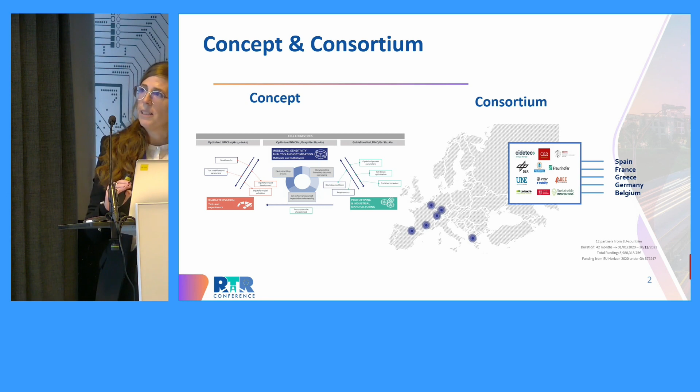So the main purpose was building the baseline on multiphysics modeling tools, very much dedicated to electrode fabrication, the electrolyte filling process, and then linking this to a specific process chain into the cell performance and cell aging.

So at the center, let me see if I'm able to, where is the, sorry, yeah.

So the main purpose, as I was saying, is building the multiphysics, multi-scale modeling on the electrode fabrication and electrolyte filling. And for that, we carry out a lot of activities in setting up the baseline, but we cannot forget that we are in a real area as well, and we need to have a lot of insights and a lot of information from the real cells, real materials, and real electrodes.

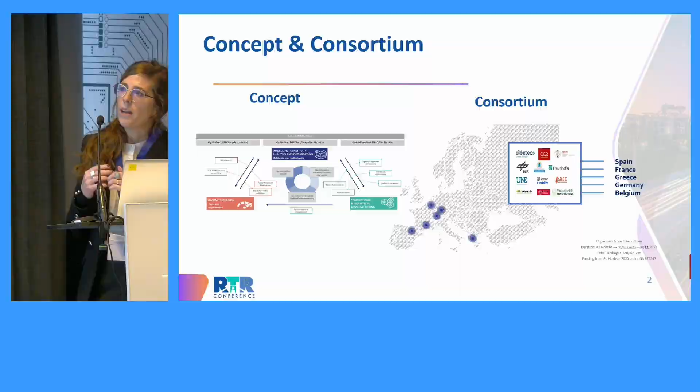So it was like a combined modeling effort. There were certain activities on the characterization, manufacturing, and without forgetting certain aspects on the standardization. So the picture was clear. We needed to build this baseline and to answer certain KPIs, and these KPIs were very much dedicated to increase the energy density, increase the cycle life, and obviously reduce the cost. And also certain activities on reducing the experimental workflow.

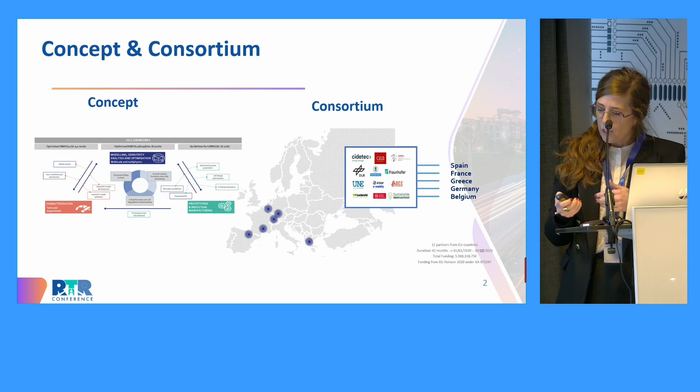So for that, obviously, CIDETEC is the coordinator of the project, but we are not alone in this. We've been working a lot with many partners in the consortium, and altogether we were 12 partners, so CEA, CERTH, DLR, UPM, Fraunhofer, UNE, IRITAR, ABE, Leclanché, TU Braunschweig, and Sustainable were building this huge consortium with this specific target of building these physics-based models, with this picture of having more insights on the electrode fabrication, electrolyte filling, and linking these two processes into the cell aging.

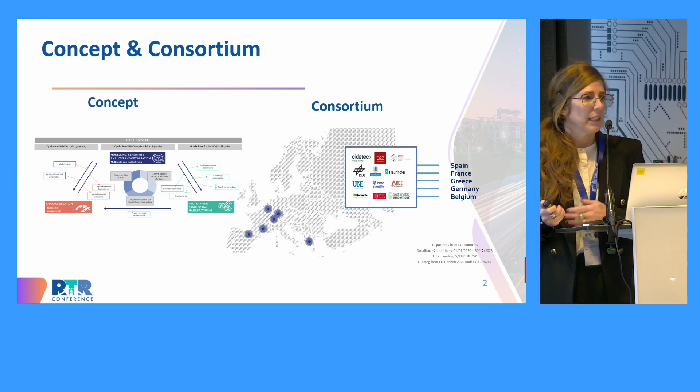So as I was saying, the project was started in January 2020 and was over last December. We had a total funding of 6 million euros, and it was answering the topic LCBAT 6. Yeah, so I like to include this slide, which somehow summarizes all the achievements. So let me start from the beginning, because I was saying that the main purpose obviously was to set up the baseline.

So we developed 12 modeling tools, very much dedicated to this specific electrode fabrication, electrolyte filling, and then addressing certain aspects of the aging. Then, obviously, the main purpose of having these tools was to give an answer to optimization, somehow reducing, as I was saying, the experimental workflow. So going straight to the point, identifying the main limitation on the cell level, or electrode fabrication or whatever. So having this information beforehand, then you can save a lot of time in the experimental workflow.

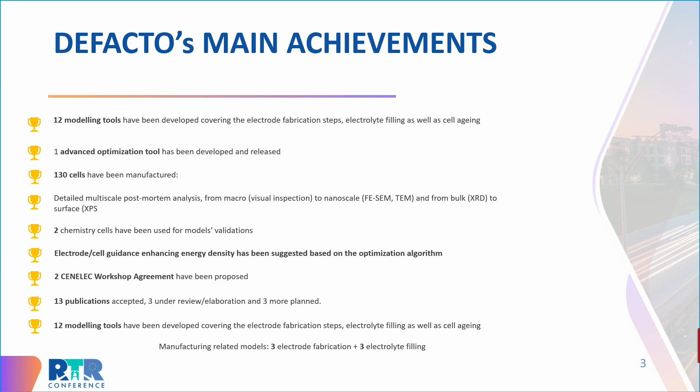And for that, we needed to carry out a lot of work on the experimental side as well as in the manufacturing. So we built around 130 cells, not only dedicated to one specific chemistry, because we navigated along the Gen 3A together with Gen 3B technologies, addressing the challenges for each particular chemistry. And then also, as we carried out aging on most of the cells, we needed to also understand a little bit the degradation mechanism. So we carried out post-mortem analysis, and then we linked it to certain electrochemical characterization dedicated to identifying the degradation modes. Then we were able to have information for model validation.

So in the end we carried out the activities on model calibration for 2 specific chemistries, and they were graphite NMC 622 and graphite silicon NMC 811, and we were taking this into consideration all along the way with the information from the optimization tool and from the post-mortem analysis. We were somehow able to guide this design space of the electrode fabrication and the cell configuration.

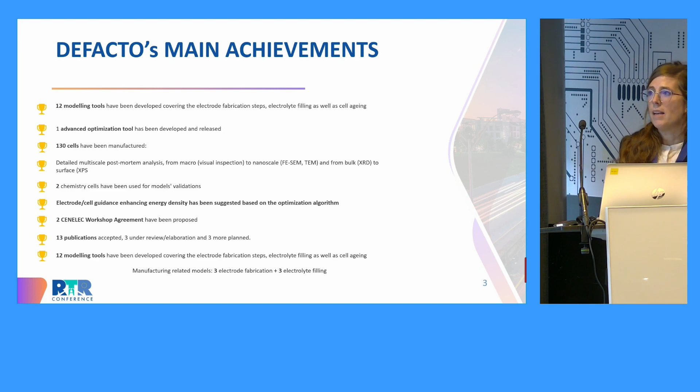So these are the main achievements of this specific project, but then we also carried out certain activities on the standardization, because when you are dealing with the modeling or even with the experimental side, you want to compare: my model is better than yours, or your experimental cell has a lot better performance than mine. We need to standardize the way we build this test, for instance, or the way we validate the models. And we had this idea of somehow contributing on this line as well. So we carried out certain activities there.

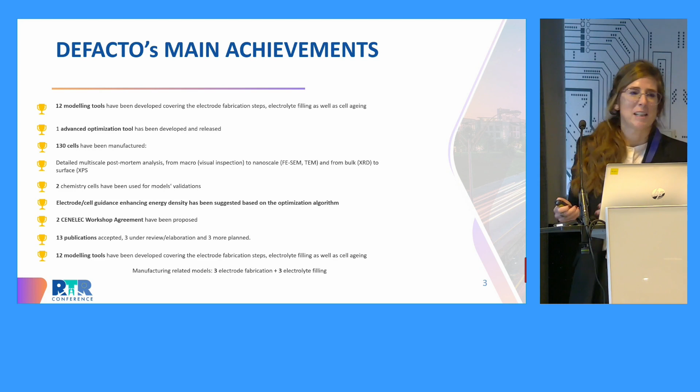And then we were able to do certain work for the academia, publishing results, but as well as open source, because we were able to release certain open source tools that are already available on the DEFACTO webpage, in which anyone can download, play with it, run simulations, and then give us feedback, because this is the purpose of having this open source available. So results, which is the most important thing today, I guess, sharing real results.

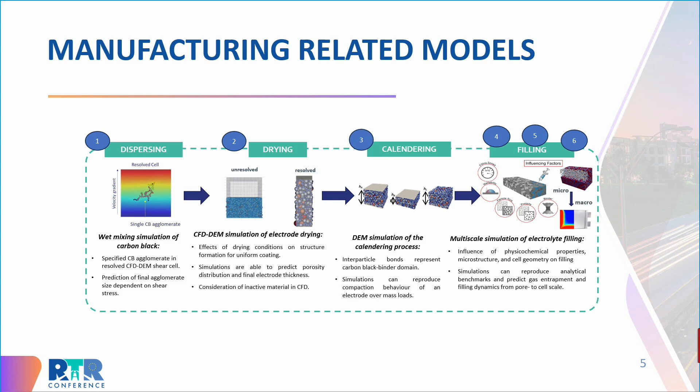Yeah, so this is all the workflow for the manufacturing models, and as I was saying, we are very much dedicated to electrode fabrication and electrolyte filling. So in here, the first three models were very much dedicated to the electrode fabrication, while then there is this column related to the filling process.

So I'm now focusing on electrode fabrication, and we were focusing on the mixing, drying, and calendering. And then from this approach that was developed by a partner, a DEM approach combined with fluid dynamics software, we're able to identify which are the best parameters for achieving certain properties.

So for instance, in the dispersion or mixing process, they were able to predict certain rheology properties depending on the agglomeration of the carbon black domain. In the drying step, they were able to predict properties so relevant in electrodes, such as the porosity and tortuosity, depending on specific process parameters of the drying.

And in the calendering, again, depending on the pressure applied in this specific process, they were able to predict porosity and tortuosity, so that they could also predict ionic resistance, which is very interesting to know in advance in order to see if there will be a certain limitation, for instance, in fast or high C-rates. So these are the three models that were developed on the electrode fabrication.

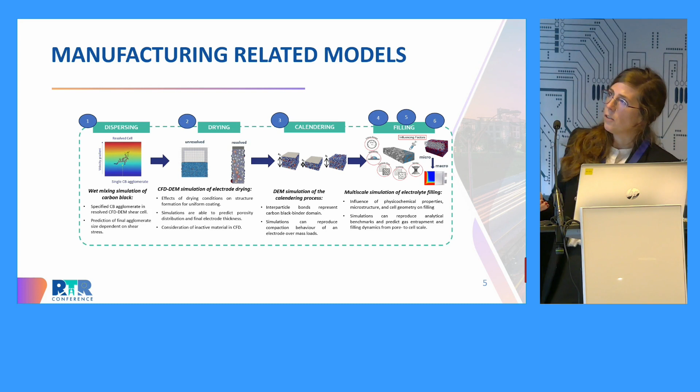So yeah, this is on the manufacturing step, but we did some work also on data treatment. Considering the data that was obtained through the characterization workflow on the microstructure, they built a software library that was able to predict certain microstructures. And this is really important, because then you can build microstructures that have not even been manufactured, and then link directly to the models dealing with this microstructure building through the electrode fabrication.

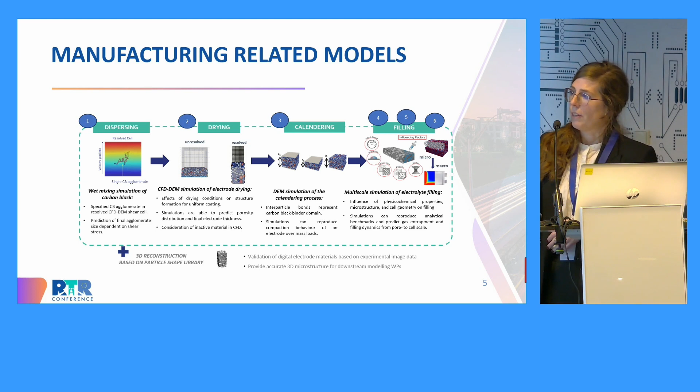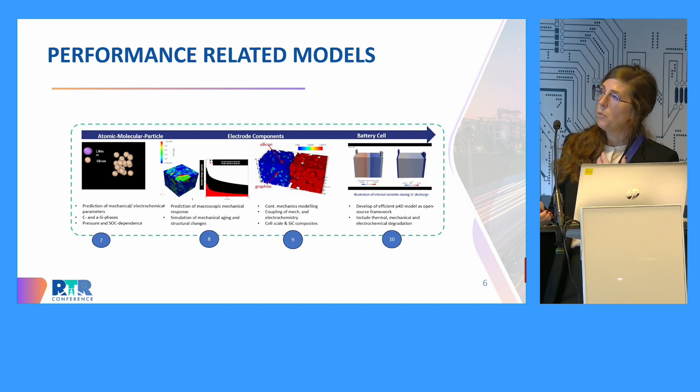And now dealing with the performance, again, with this multi-scale approach, we go from atomistic to meso to the continuum scale. In particular in DEFACTO, we have graphite silicon, and here the swelling of the silicon is really important. You need to address this swelling correctly, because otherwise it might cause cracking. And this cracking will lead to higher polarizations and also lower cycle life.

So basically, with this multi-scale approach, we predict on the atomistic scale certain properties on the mechanical side, giving this information to the electrode modeling, and then it turns to the battery cell, where you homogenize the information at the cell level, and then you can predict certain aspects of the whole cell.

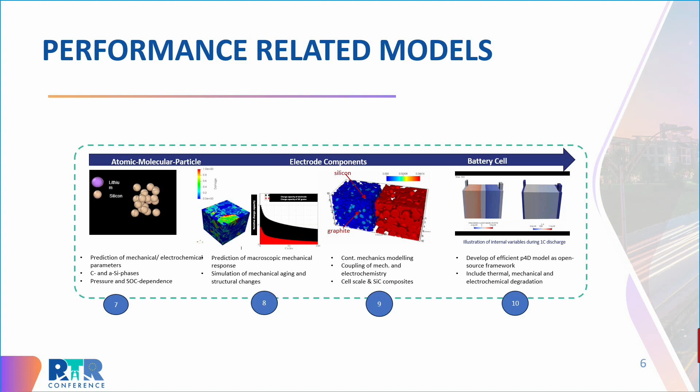Okay, and then I was talking about certain aspects that are not really in the topic itself, but we think it's really interesting, because it's not only about building an accurate model, you need to run it in a reasonable time, so that you don't need to wait a couple of days or weeks to see the results. So we were also addressing the computational cost, and this is why we were working very much on reduced models. This is not a simplification of the model, we just play with the numerics, capturing all the mechanics, all the physics and all the electrochemistry without simplifying equations. We were able to reduce the computational time by a factor of 10.

So this was very interesting, and something that I didn't mention, this is already available in the DEFACTO project, so you can run simulations within this tool, and this is another outcome of the project, which is good for the community, where you share these kinds of achievements and someone can take advantage of this. So this was on the reduced models. This is very much on the design space, but we were thinking that with a similar approach, these tools can also be used for control aspects.

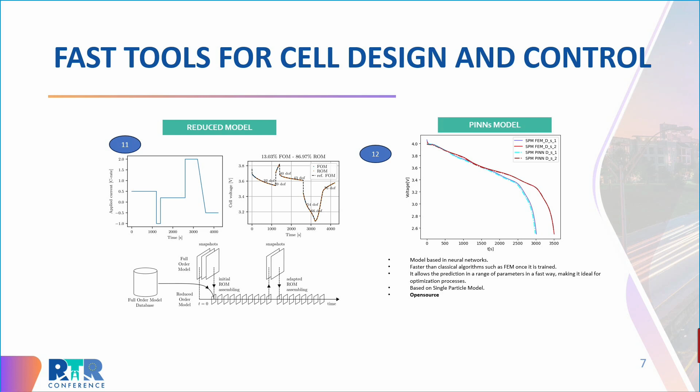And yeah, so this is another achievement which we have made. And then very much on the optimization. As in DEFACTO, the main purpose was to somehow save time and improve the design, so we needed to address the optimization tool. And here, I mean, this is what we were

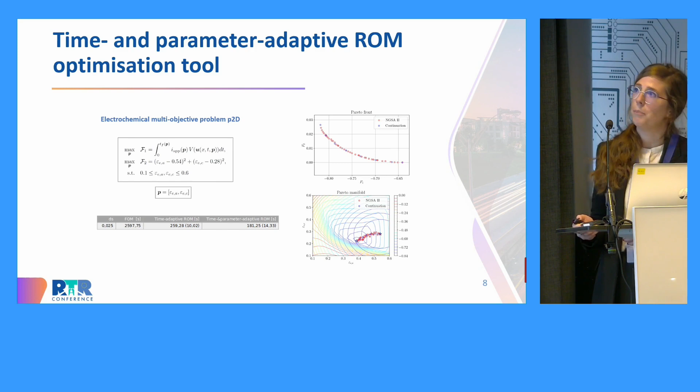trying to build with this optimization, but this implies that the reduced model that was developed needs to capture the parameter dependency and also the time dependency. So there was a lot of work in here, but with this focus on having a model available. And again, it's available.

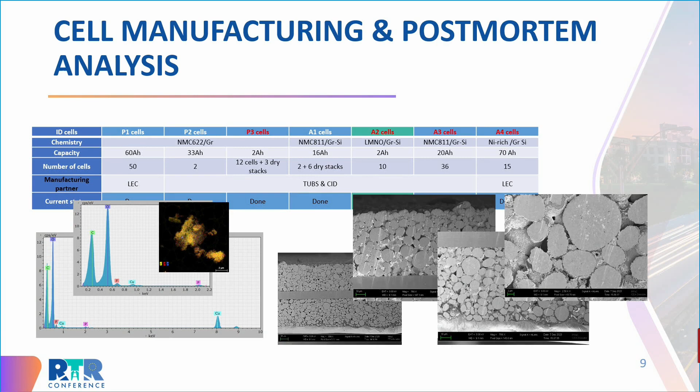So manufacturing, these are all the cells that were manufactured. And yeah, we aged them, so we properly made a design of experiments, in a way that we were identifying specific degradation modes for each of the experiments, and we carried out cycling as well as calendar aging. And then we did postmortem.

So we were able to identify the degradation modes, and this is really relevant for model validation. And together with the cycling data, through the dQ/dV analysis, we were able to quantify cyclable lithium loss or active material loss, and we have used the data for model validation.

So this is an example of model validation for the two chemistries. We've been working very much on this graphite NMC622, which were the cells that were built and manufactured at the beginning. So we were able to validate each of the models for each of the steps in the whole value chain, as well as we did certain work for validation in this specific chemistry. So these are the samples we've been tackling.

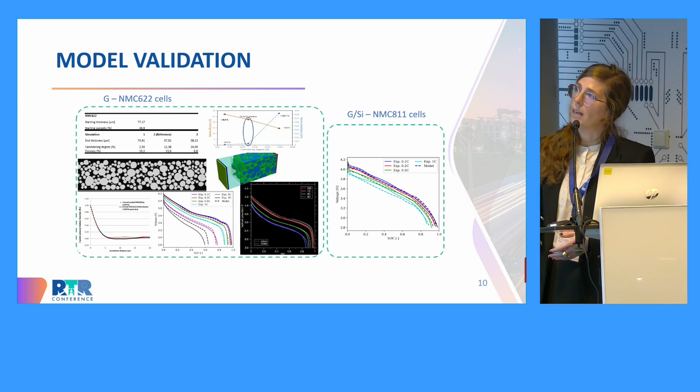And then I wanted to address that we also wanted to start communicating each of the steps with the next one. I mean that, for instance, the drying step might have an impact on the microstructure, but then this microstructure will also affect the calendering step, as well as the final microstructure will affect very much the way you include the electrolyte.

So coupling was also necessary, and even though it was not really written in the grant agreement, we thought it was really interesting to collaborate within the different models. So these are some of the samples.

So here what they are doing is capturing the calendering parameters' influence on the microstructure of the electrode, and then with the mesoscale modeling on the cell performance, they were able to predict the ionic resistance contribution as well as the electronic resistance. So this is, for instance, one way to link electrode fabrication together with performance.

And if you know this information in advance, then you don't need, for instance, to start modifying the conductive additive, because maybe the limitation comes from the ionic resistance and not the electronic resistance. So this was one of the samples.

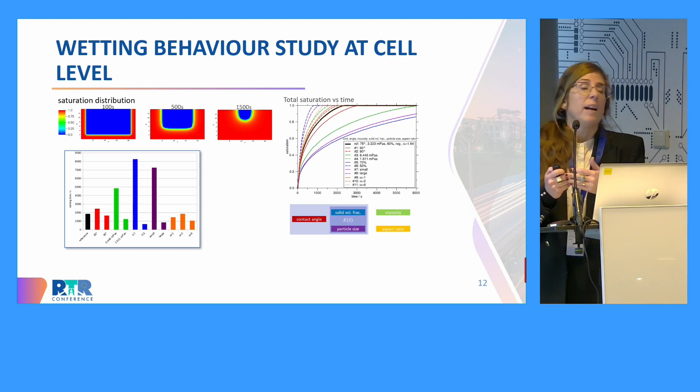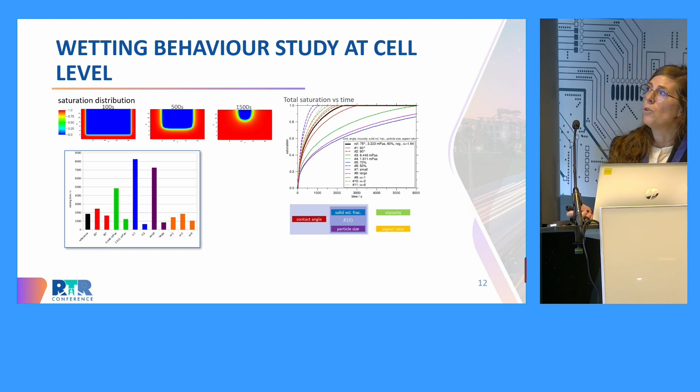Another one was on the wetting behavior. So with this multi-scale approach, we were able to predict certain pressure saturation plots. And this is again crucial, because if you want to avoid any gas entrapment, and you need to optimize and obviously accelerate the electrolyte filling, you need to know this kind of plot in advance, because otherwise maybe you don't reach the full minimization of the gas entrapment.

So yeah, and then again the multi-scale approach, which is very interesting, because you are not only addressing the electrode at homogenized level, because obviously the microstructure is a huge, very complicated system, and it will depend very much on the fabrication step, but will have a lot of impact on the performance. So the way you manufacture this microstructure is the way you will get the final results.

So this is another sample in which we are combining this multi-scale approach together with, for instance, in the calendering steps, the pressure of the rolls suggested.

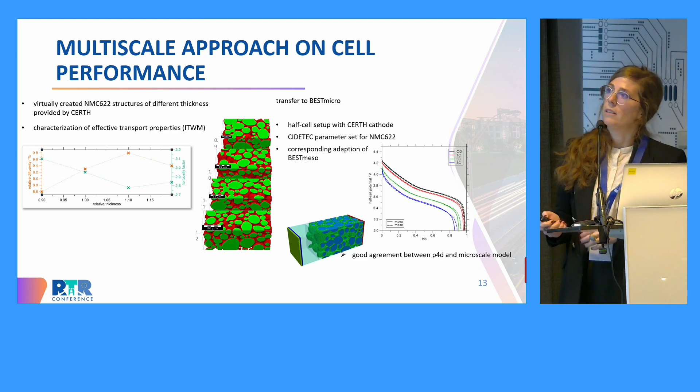And then obviously I was saying that we solved this optimization, and this optimization gives us a lot of information, because it was also implying a certain sensitivity analysis, and we needed to know exactly which were the most sensitive parameters affecting the cell performance. In the end we discovered that we were able to achieve high energy density, which in the call was requested to be 300 watt-hour/kilogram, which is, I guess, a huge number.

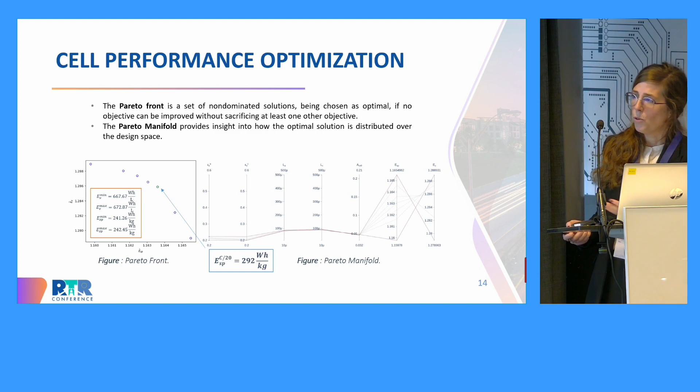So we did this work as well, and this is good for us, because you know exactly which are the parameters that are more affecting, and which are the ones you need to modify. Because if you are not modifying these ones and you are modifying other ones, you won't get the results.

Okay, and finally, standardization. So it's again on the modeling. We are covering a lot of models. This needs a lot of information on the parameters, because in the end we need to have models that are validated against real cells. So you need to have the information on which are the parameters in advance, but also the way these parameters are measured.

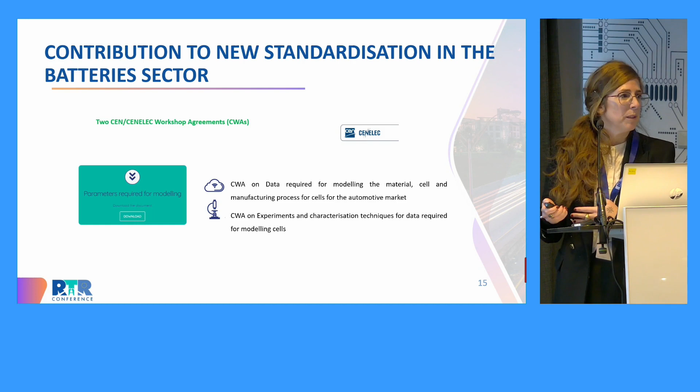What we've been seeing, and I didn't put anything on there, is that the way you measure porosity, for instance, is crucial. You can have the theoretical value, the porosimeter value, or other techniques, and depending on the technique and the procedure, you won't have exactly the same value. So this was a starting point, obviously not a standard, but a CEN workshop agreement, a certain baseline on that road of standardization, and we are somehow proud of it, because in the end these two CEN workshop agreements were published.

And something on the publications: at this stage we have achieved 13 publications, and again, we are happy because this is a way to share results with the community, and we think it's also important to have this openness to the community.

Mid-long term expected impacts for the project is not really an easy aspect, but what we can say is that one of the aspects we were very much focusing on is to build these accurate models, and not only accurate, because we wanted very efficient models, not to wait a long time for the simulation. We were able to guide on enhancing lifetime too, because we were including the degradation modes and degradation mechanisms. So with these different paths and different testing procedures, you can somehow predict the lifetime.

And then, as we have the capability, link to the fabrication as well. So, certain activities on learning and training methods that are available for anyone interested, already on the web page. This was a really challenging target, but we've been doing certain work on calculating how much effort it takes us internally to manufacture prototype cells.

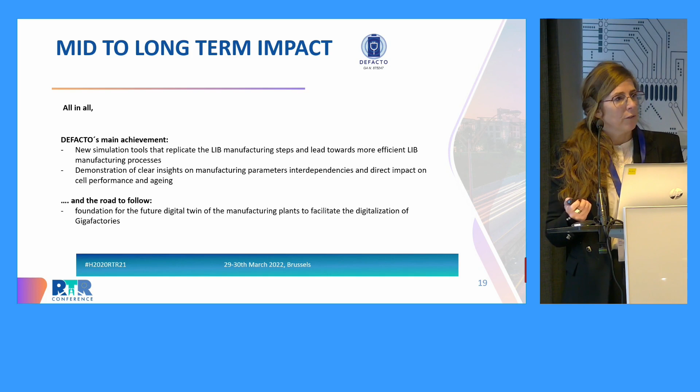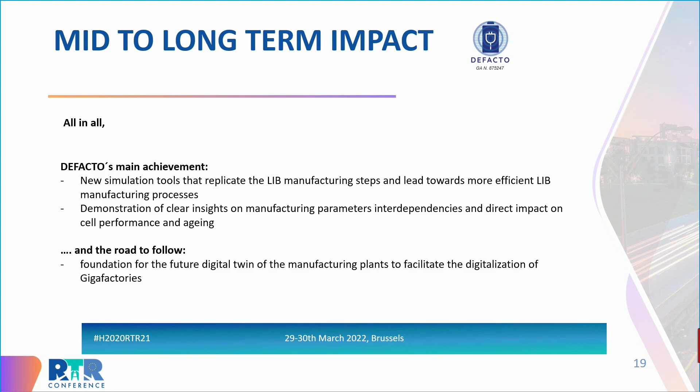Obviously, we are very far from building these digital twins, because these models were built for addressing the understanding, not really for controlling the manufacturing, but they could be used as a baseline for this specific purpose.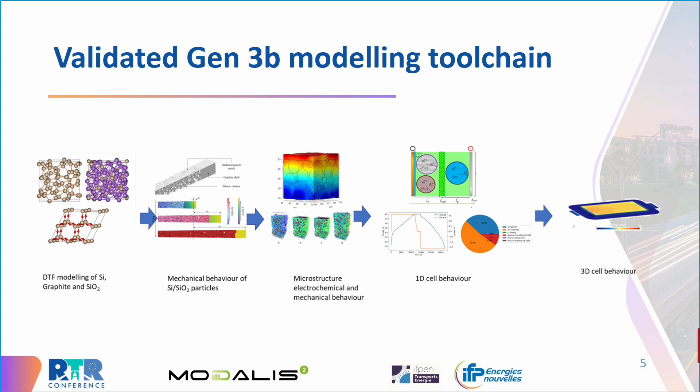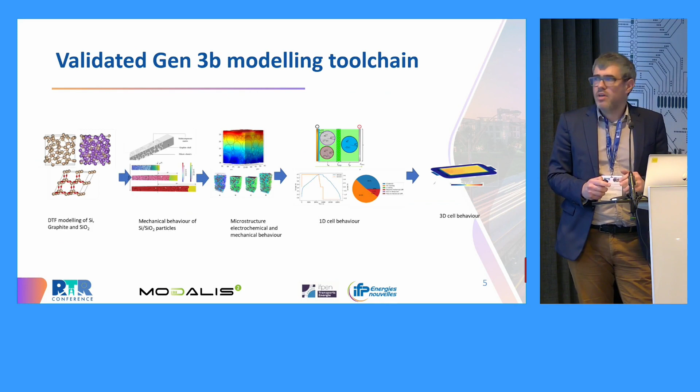So the main results that we have are two modeling tool chains. The first one was dedicated to Gen 3B cells, where we developed a multi-scale approach from molecular modeling until full cell behavior. This tool chain was tackling a lot of different aspects, but we needed experimental results to validate it. So first, we needed an experimental characterization of Gen 3B battery behavior. As you maybe have seen in the LCBAT 5 presentation yesterday, it was not an easy task to get these cells working, because we have very challenging materials to implement into the cells.

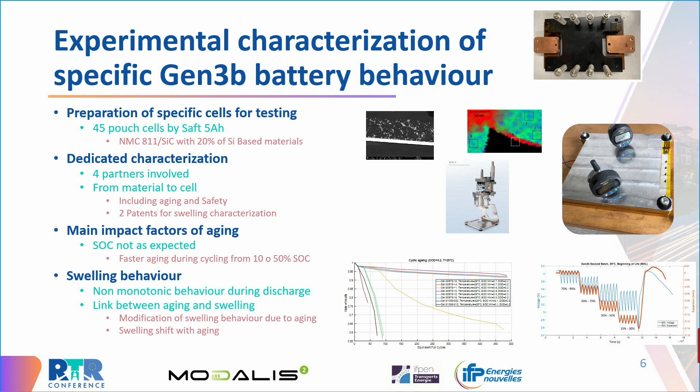So we had to manufacture cells which were provided by SAFT. We had 45 cells, 5 ampere-hour cells, with 20% of silicon in the negative. That's a very big amount of silicon, leading to a lot of issues regarding the cycling of the cells. But nevertheless, we were able to create these cells and analyze them to get their general performances, the mechanical behavior of the electrode and the full cell, and also the main aging mechanisms.

To do that, we needed to put together an experimental campaign and share these results. So we needed to do a benchmarking of the laboratory practices to make sure that we had similar results and could compare them, and then put protocols in place to share the results between the partners. What we saw was very interesting results regarding aging, with a strong impact of mechanics on the aging of batteries. Obviously, the more the battery swells, the worse it will behave in terms of durability.

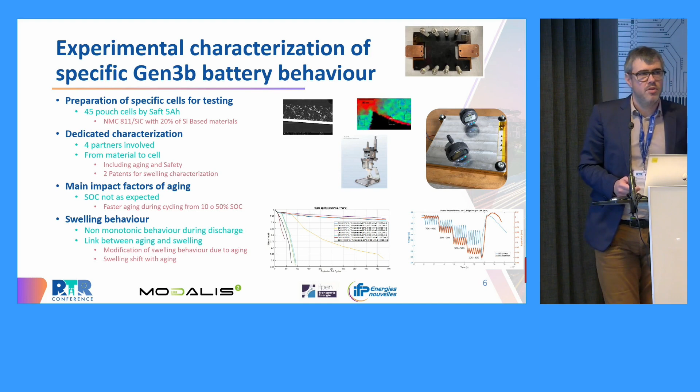And we saw that with some conditions, we had a very fast capacity degradation. And also, we were able to see some very specific behavior regarding the swelling due to the intercalation, the differentiated intercalation of graphite and silicon. So it was very interesting to see that and to see how the model compares to this kind of behavior, to see whether we were able to tackle this specific behavior.

On the modeling side, it was, I'd say, much easier to do this modeling compared to the experimental. Modeling, you just have to run the calculation and you have results. Obviously, you cannot say the results are true before you have the experiments, but you have results at least. It's not the case already for experiments.

But the thing that we were very lucky at is that when we compared the experimental results at the end of the project with the modeling results from the beginning of the project, they were matching quite well. So we didn't have to have a lot of iterations in order to make this validated and calibrated.

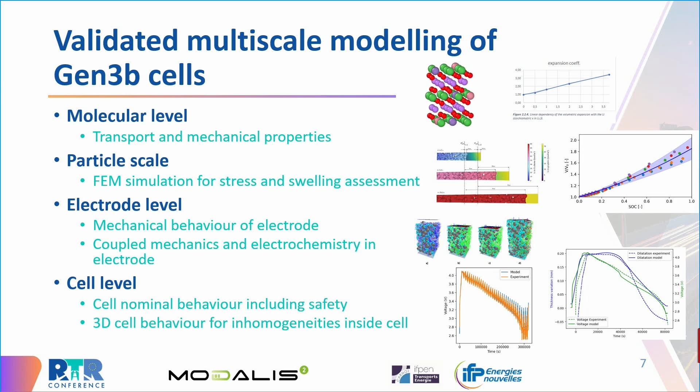So from the molecular level, we developed some specific models in order to understand the transport behavior and mechanical behavior of the materials. These parameters were used then into a particle scale model, which is here, where we could understand how the particles made of silicon and graphite would swell because of intercalation and alloying.

This gave us some specific behavior of the particles that could be implemented into an electrode level model, where we could understand how the electrode will behave during the cycling. And this was integrated into nominal behavior, including safety, for the full cell and 3D cell behavior in order to understand the heterogeneity effect on the battery behavior.

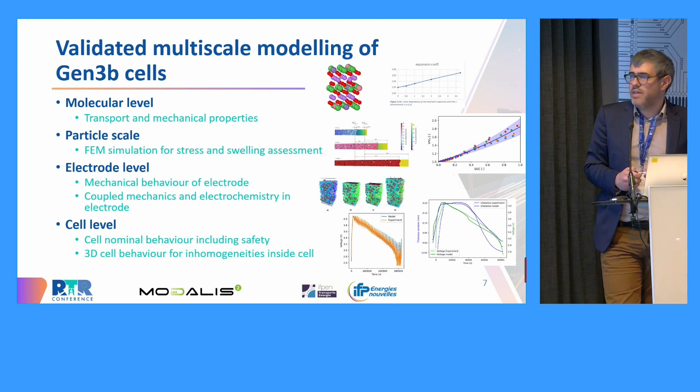The same kind of approach was also done for Gen 4 batteries with solid-state electrolyte. So we had to prepare specific cells for this kind of material, and it was already a challenge for Gen 3B, but for Gen 4, we had an even lower TRL, so we had a lot of surprises linked to the behavior of the cells compared to what we expected 5 years ago. We were able to build 20 cells in pressure cells with lithium indium and the negative, NMC 811 and argyrodite electrolyte, and we did the characterization.

The first aging campaign we did was not so successful with a lot of difficulties, so we needed to discuss it from the modeling point of view to say, okay, we observe that, what can we understand from the modeling, and how can we improve our experiments in order to get some results, at least to validate our models.

We did some specific material characterization with NMR, SEM, and so on, microstructure characterization, and a full cell characterization to evaluate the C rate and the capacity of the cells. The TRL was too low, sadly, to do some aging on this subject because after a few cycles, the cell would not have any capacity left. So we had to stick with nominal behavior first.

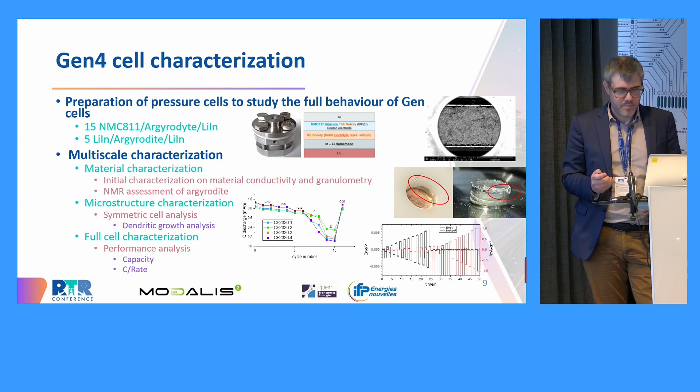On the modeling side, we did also some molecular and ab initio modeling in order to understand the behavior of the electrolyte, how the lithium ions are transported into the electrolyte in order to put them into a full-scale model. What are the properties of the lithium indium, which was not the main topic in the beginning of the project, and also what are the main properties of the interfaces.

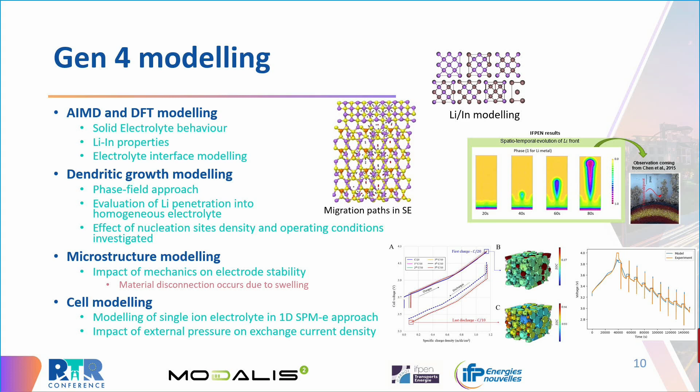Interfaces between NMC and argyrodite, and interfaces between argyrodite and lithium indium, and argyrodite and lithium, which showed some obvious result at the end, but it was possible through calculation to validate what was observed in real life, especially that lithium indium was far more stable compared to lithium towards argyrodite.

Then we did a phase field model in order to evaluate the behavior of the electrolyte and how it was stable in terms of lithium argyrodite interfaces. So we were able to build this model in order to evaluate the dendritic growth into this material.

We went to microstructure modeling in order to evaluate the effect of the microstructure on the positive electrode behavior with the NMC. So it showed that due to swelling of the NMC and mechanical stress, we had a very fast degradation of the interfaces at the NMC side, leading to material capacity fade for the cells.

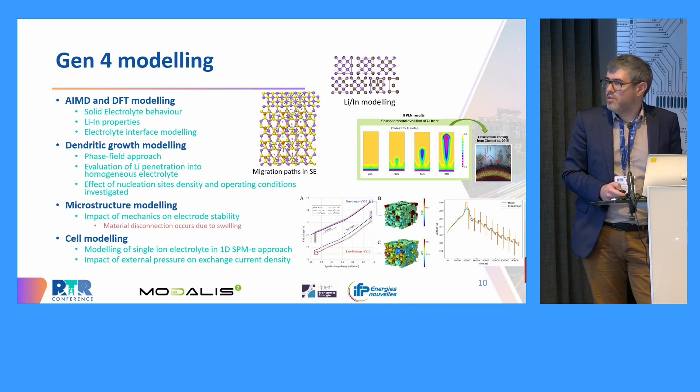And finally, at the full cell level, we were able to validate the model behavior in 1D on the full cell behavior in order to finalize this model at the end of the project.

So what are the main impacts of the project? First, we dedicated this work to next generation batteries. And this gives us a lot of insight on this behavior and how to implement new materials and new technologies for the next generations. These new models have been implemented now into industrial tools from Siemens. These commercial tools are now available for customers in order to create new designs and create new implementation for these cells.

Then we were able also to evaluate the reduced development times of these models thanks to the developments. It was not an easy task because of the low TRL. A lot of what we had to do was to reinvent the wheel as we were doing the work, obviously. But when we compared what we did from the third generation of cells for Gen 3b and the second generation of cells, we saw that we were able to reduce by 35% the number of experiments needed for this specific approach.